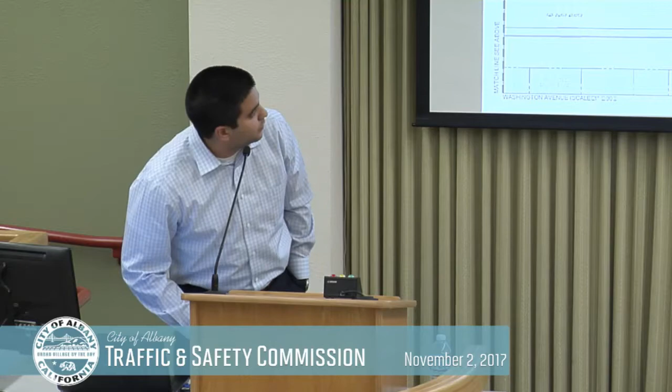All right, so we'll start with the San Pablo Avenue corridor. This is an overview of the entire corridor, and what we're proposing to do is shown in blue right now. Each slide will be zoomed in for a better representation of each intersection.

So this is right by the car wash, right where the city limits are. The intent is to put a...

Do I need to speak to the mic? Yeah, they have to. There's also a cordless one, so there should be one nearby. You turn that on the bottom. And it's helpful for the recording if you use your mouse to point at the screen. Oh, okay, then they can tell. Yeah, then it gets stored in the video like that. Great, okay. I guess I'll try using the mouse and pointing then. I can use the mouse, it's fine.

So right here at the city limits, we're planning to put some kind of gateway to Albany, as far as putting a median there, and then potentially a sign that says 'Welcome to Albany.' On either side, west and east, we'd put a bulb-out with a trench drain that runs through, allowing water to pass, but also adding landscaping to make it an inviting entrance into Albany and set the tone for the city.

This is just the existing condition, and there will be medians and planters in this area.

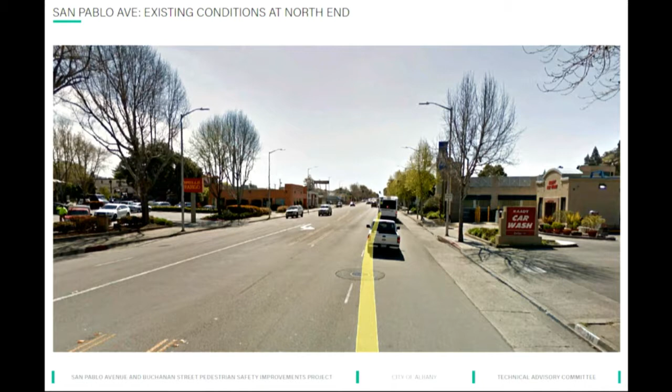The first intersection we'll look at is Brighton and San Pablo Avenue. One of the biggest concerns here is the left turning movement conflicts with pedestrians in this area. There's a lot of pedestrian traffic due to Albany High School and Albany Middle School. The goal for the entire project is to get pedestrians from one side of San Pablo to the other safely, without any conflicts with cars or bicyclists either. This is also an existing condition over at Clay Street as well.

So this is what we're going to propose to do at Brighton Avenue and Clay. For Brighton, we're intending to do some signal timing changes and add a lead pedestrian phase there. It would add about 5 to 7 seconds to the pedestrian phase to allow them to get into the crosswalk earlier before the vehicles can start, making them more visible to vehicles as they're turning left.

At Clay Street, we'll be adding a couple bulb outs on either side, on the north side. This will help shorten the distance for the crosswalks going across the street, and will also make pedestrians more visible to vehicles, as the bulb out will push them out into the crosswalk area so drivers can see them better. There's also a pedestrian refuge for anyone who can't make it across safely, allowing them to stand and wait without any conflict with cars.

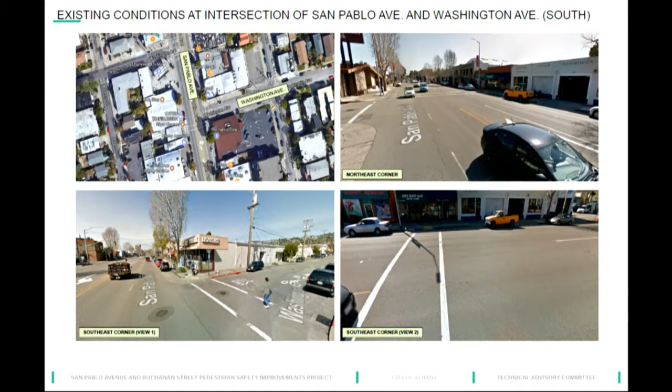Washington's a very interesting case in that it's a gap between two planned or existing bicycle facilities. Because there's a stagger in the intersection alignment, that presents a very challenging movement. Right now, if a bicyclist tried to get from the west side to the east side of Washington Avenue, they have the choice of either riding the sidewalk on San Pablo or trying to get into the center left turn lane across two moving lanes of traffic without the benefit of signal control at at least one of the intersections.

So what I have in front of you are 3 options we've developed. The first two, we were just trying to be very creative and throw all kinds of ideas out there. The third one, we actually received feedback from the Technical Advisory Committee on some other options they'd like to see, and we think that one is the most promising. So without further ado.

However, we've noticed that the auto shop will sometimes park in their driveways, so in a practical sense they may claim they have more parking out there. On the other side, on the east side of the street, we have several high traffic uses — a liquor store that gets a lot of turnover for curbside parking, and several restaurants, both here and near the north side. So we wanted to be really sensitive about the parking uses.

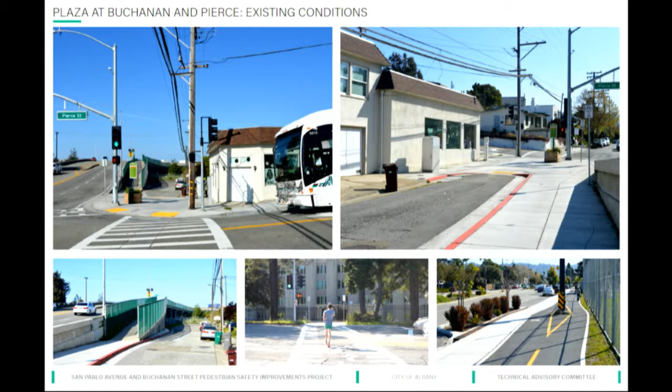And this is the Pierce Street improvements. So we're planning to extend out here and put a landscaped area in this area and over here to make it a little bit more inviting and add vegetation and some stones. And then, because bicyclists cross this street, we'll be increasing the size of the curb ramp to allow for easier access for bicyclists to get up onto the sidewalk and cross Pierce Street.

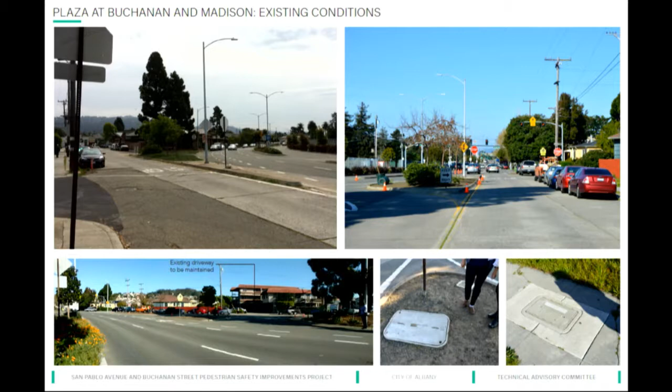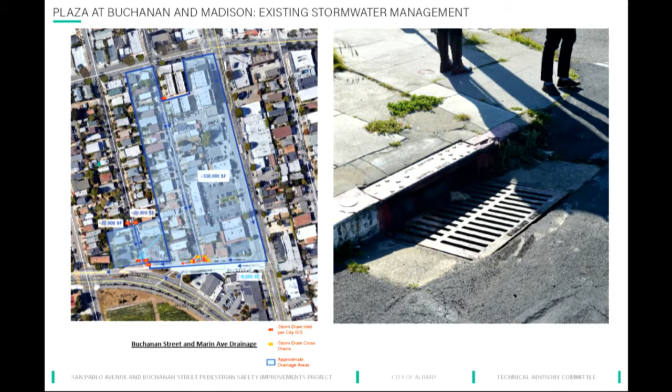This is a representation to show that there's a lot of water coming down Madison and Adams Street and going towards Buchanan Street. We looked at this as an opportunity to implement a rain garden in the parklet to treat the water, but also provide aesthetic appeal to people.

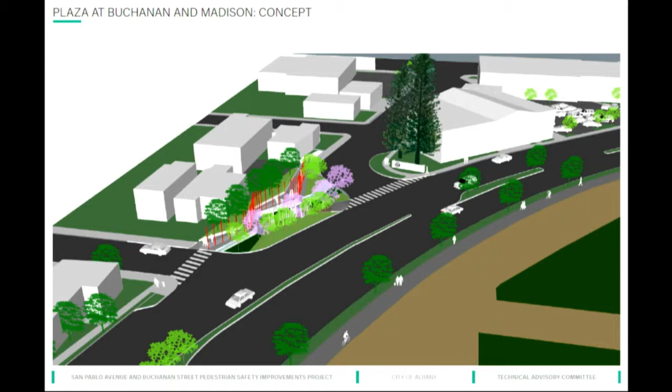Here's a couple more representations of the park. I have to add that this is still just a concept. I think the Park and Recreation Commission will have to have more of a say on what is inside this park, whether it's a bulb-out or a giant pocket park. But this is just a concept right now.

So just a number of different angles to see. You can see here the rain garden represented in the dark green, and the gutter on the right.

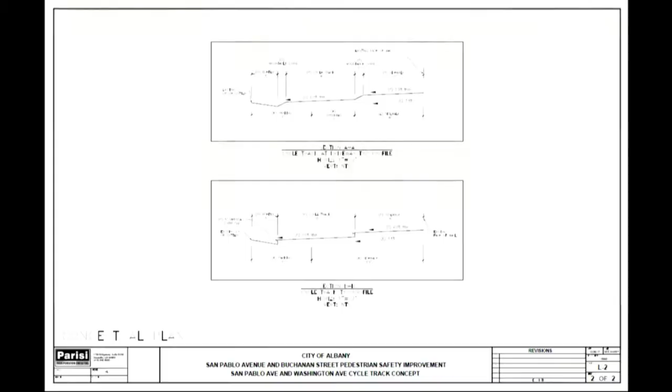Everybody has a copy of the public comment we received via email from Preston Jordan, representing the Strollers and Rollers. I think after we hear public comment, I'd like to go through Preston's letter item by item, if you'll give me the leeway to do that. But it's pretty detailed, so I won't consider it as questions for now.

I know that we have a number of bus stops that are old, near side, and in uncontrolled intersections. When the city was going through the complete streets plan, did they consider bus stop relocations as safety improvements? We have not, but this is an opportunity to address that if we can.

I think the ones that come to mind are, well, I think there's only one set that we would really have to look at, and that's aside from Solano, San Pablo and Solano. Well, there's also some older stops on Buchanan as well. San Pablo and Solano is not included in the project limits. The project limits for this process are the southern leg of Washington.

So then at Portland and at Castro, there are near side bus stops, and I think those are both uncontrolled intersections. Is that correct? Yeah, it'd be good to see if we can take a look at those. I can make more comments later in the comment period after public comment.

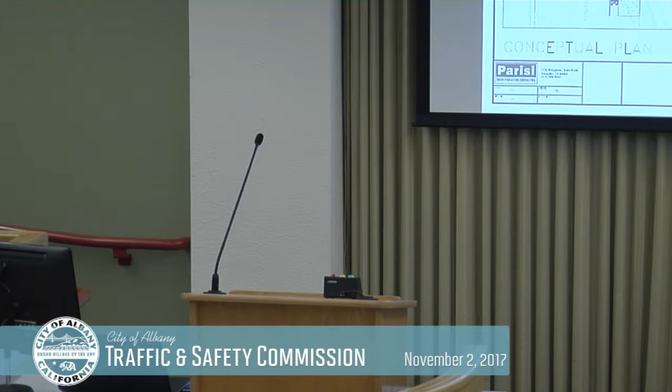Bring it back for comments. Well, it seems like we're going to need some time to talk about the Washington options and some time for me to go through Preston's letter. So, if people have other specific suggestions, I might ask that we do Preston's letter first, because it may cover some of the same ground. And then if people want to add additional specifics, do that after. Does that make sense? That would be okay with me on an intersection by intersection basis. Yeah, but if people have other more general comments, maybe that should go first.

It's great to see the plan coming to fruition. Yeah. I guess I can try to make this general.

So what I was asking questions about the bus stops, there's a few things we want to avoid generally. The worst possible condition for a bus stop location is near side uncontrolled, right? That's by far the most dangerous. There's unfortunately plenty of incidents that have happened because of that, where you get off the bus, or you're not on the bus, and then you try to cross the street, and that bus is prohibiting your view to get across.

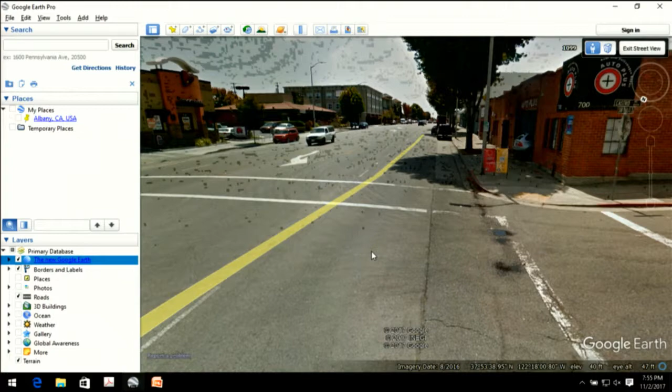I do want to question that more, but I'll do that when we go intersection by intersection, if you don't mind. Can we wait till we're going through all of them? Did you have any other? No, I think it's good to go through each intersection and talk about it. And then I think the discussion about the Washington bike treatment should be separate. Maybe. So do we want to cover everything but that first? Yes, okay, that's a good plan.

So starting at San Pablo and Brighton, the Strollers and Rollers request is to move the crosswalk to the north leg, because most of the conflicts with moving vehicles have been people from Brighton turning left onto southbound San Pablo, where they've already picked up some speed as they go through the intersection. If the crosswalk was on the north side, any conflicts with moving vehicles would be people coming from Brighton and turning right onto San Pablo, who would not be moving so fast yet.

Was that considered at all? Yeah, it was considered. You can see on the north side, over on the west side of the street, there's a traffic signal there that would have to be relocated. There's not enough space to put a curb ramp there in the current sidewalk, so you would have to bulb out to put the crosswalk or the curb ramp in. But there's an existing driveway right next to that building that we would have to reconfigure. And also, with the drainage issue along San Pablo Avenue, there's not a ton of storm drain in the area, so it would create low points at the bulb out, and we'd have to install storm drain infrastructure.

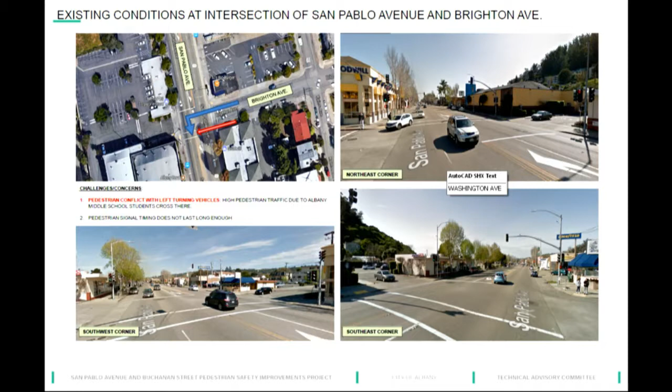So where we have it shown on our plan is where we feel it works best with the drainage, because at Clay Street there is some storm drain infrastructure, and that's where the culvert runs through as well. But past Clay Street going towards Brighton, there isn't any storm drain infrastructure. We would have to run a storm drain line from Brighton all the way down to where the center of the block is and where the creek is. So we did look at putting bulb outs in this area, but due to the drainage issue, it was not necessarily feasible in this phase of the project.

Okay, so what I'm hearing you say is that these requests are technically possible, but significantly more expensive. Is that okay? Towards helping us gauge how important that might be, having a pedestrian leadoff seems valuable. Unfortunately, if there are people with pent-up desire in their cars to turn left onto San Pablo, that would actually give the pedestrians going west just enough time to get in their way. So it's not a huge solution.

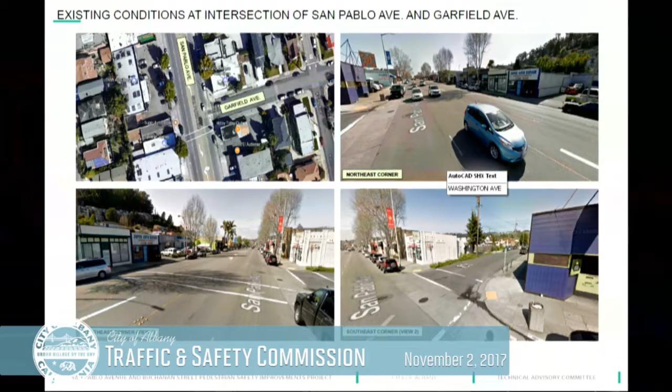I think I skipped over San Pablo and Clay. If anyone has, there were no strollers and rollers comments on that one either.

Back on the issue at Brighton, could you put a trench drain in on the backside of the bulb, and would that be a more affordable solution? So we've looked at putting trench drains in, but because of the bulb out, the curb ramp would be in part of the bulb out. Trying to run a trench drain underneath it, there wouldn't be enough depth, so you would have to run it behind the curb ramp and go around it to get it to the other side.

Would you have to go into the sidewalk to do that, or can you just? So it sounds like there's not enough space to do everything—the ramp, the signal, and then a trench drain on the backside. Yeah, you'd have to route it around behind the curb ramp, so you couldn't follow the flow line, you'd have to divert it around the ramp to get it to the other side, just because there wouldn't be enough depth since the curb ramp would be taking up most of the bulb out. Right, okay, that makes sense.

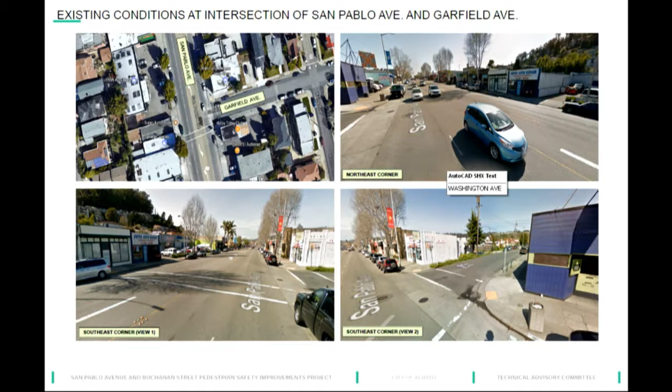Okay. All right, where were we? I think I'm ready to move on to Portland unless anyone has further issues? Oh, so Castro, Castro, yeah.

Okay, so strollers and rollers requested the east side. Consultants commented that the driveway is right where the crosswalk would have to land. Is there a possibility of shifting that part of the crosswalk a little bit to the north? So have the west half of the crosswalk at the intersection on the north side, and the east half a few feet to the north, with a kind of a Z shape in the median?

The driveway takes up, I think—see from the image, I'm not sure about your cardinals—so this would be a north side crosswalk. The goal is to move the crosswalk to the north side, you're saying. And the problem is where it lands on the east, there's a driveway. I'm wondering if the whole east half of the crosswalk could be shifted far enough north to land north of that driveway, using the median as the cross piece of the Z.

That's creative. That's something we could consider and look into. It makes it a little bit longer walk for people, but I think having a crosswalk with the median is a big advantage, and in this case, that means the north side.

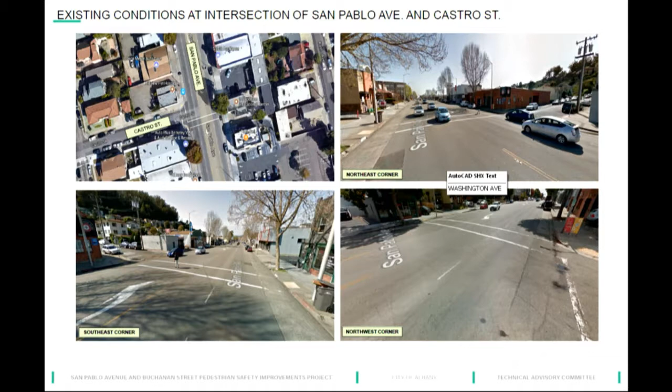What about bulb outs here? Or is it the same problem with millions of dollars worth of drainage? Yeah, correct. Okay.

So we're asking both things for this: move the bus stop and explore whatever we call this crosswalk on the north side. Okay.

Brian, when you speak like that, your voice doesn't get into the recording. You could come up to the mic, or we echo you. I'm not that good at echoing, though.

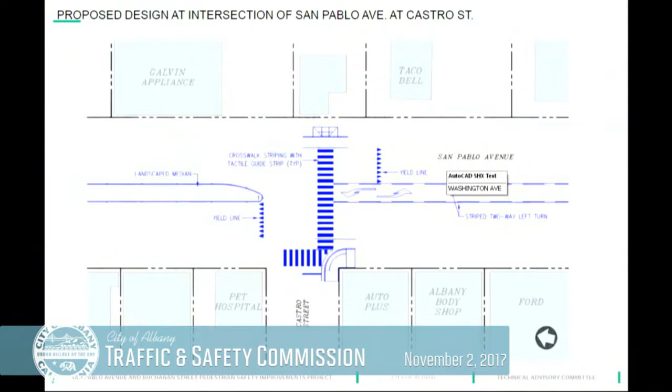So a couple of questions. One is, can you also go, if it was on the north side where the pet hospital is, cross straight and then do a diagonal to the business to the south? Like that?

I don't know what a scramble is. That doesn't have a signal head, there's no signal there, so you lose the benefit of a refuge if you go this way. If you come up here and here, then you can have a refuge and do a split leg crossing. That's pretty irregular though, isn't it? Does anybody do that?

I'm getting lots of shaking heads there. Anyway, that's another possibility, the Z could be very good. I would encourage that. I think the benefit of the Z is that the extra distance a person has to walk is done in the median, so you're safe and protected, whereas with the diagonal it's an interesting idea, but the extra distance you're walking on the hypotenuse is out in traffic.

And so then my other question was for the bulb-outs: is there a way to do like a plate here, and then just have it be open under the plate, and could enough water go under that? Like trench drains. Yeah, so it's kind of the same issue.

So we would only be bulbing out about 5 feet into the gutter, because the gutter pan right now is about 7 feet wide. Per Caltrans standard, you need a 2-foot offset from the travel lane for your bulb-out, and what that would do is put your curb ramp fully into that bulb-out. So if you were to put a trench drain across, it would run right through your curb ramp, and that's why you would have to direct it around the curb ramp to get to the other side of the curb ramp and to the other side of the gutter.

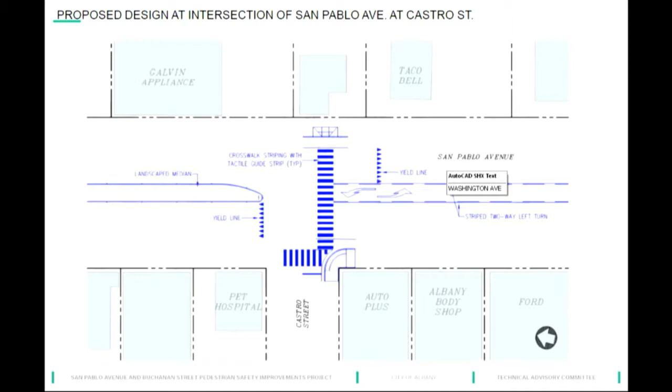Assuming that storm drains aren't a huge issue. Sorry, consistent theme. Well, I guess you could do it even without a bulb out.

Okay, should we move on to Portland? The only request from Strollers and Rollers was once again to add bulb outs if possible. I'm going to guess that you'll tell me that's a drainage problem, but...

Correct. As you get further away from Clay and Brighton, there's not as much water as at Portland or Castro, but it's just the construction of the entire storm drain line from Portland all the way down to Clay that's really expensive, and that's partly why we're not proposing any bulb outs in this area.

Okay, and then we did have a public comment. Since San Pablo is a Caltrans-managed site, what do they ever do for storm drains and things? If it gets bad and flooded, do they have any responsibility, or is it just Albany?

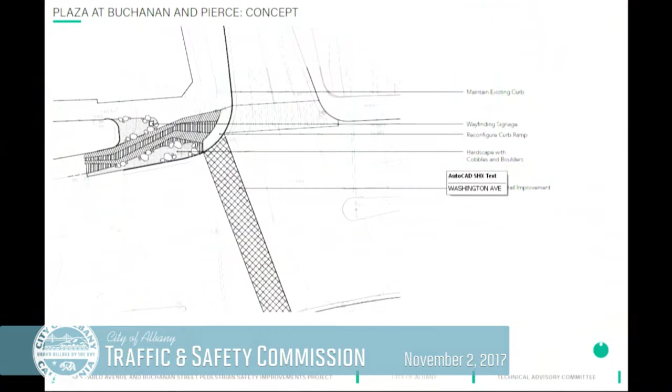It's just drawn differently, maybe. I think it's the same. Is it the same? I think the concern is just to make sure there's plenty of room for a bicycle, including a bike with a trailer, to make the turn from the bike bridge on the west side of this complex around to the crossing of Buchanan Street. The way it's drawn here, it looks reasonably good to me.

Let's see, what does the letter say? For people heading west from the intersection with Pierce, and east to that intersection, it may be too narrow for the user volume, which will likely increase once the complete route from the hills to the bay is built, which will be soon. This kind of narrow around the curve.

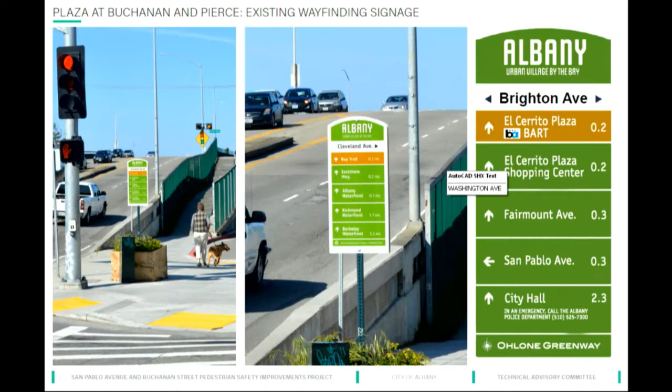Sure, well this was brought up, I think, at Park and Rec, but many cyclists actually transition onto the stub end of Buchanan there, proceeding westward. Oh, onto Cleveland, to go down to Cleveland or something? To go down to Cleveland. Yeah, so they actually call it... it follows through there, right?

Actually, this, I don't know what's this called? I don't know what that's called. The Cleveland Spur, we call it. Oh, okay, so the Cleveland Spur, sorry. It's a new sports team.

So in fact, some people instead of... well, some people come up this way to engage with the light and cross this way, some people come around this way, but this has been rather fluid, and as a user it's been nice. If you stick landscaping there, I think that actually gets in the way.

And I'm also worried about the landing area, taking up a lot of the width.

I think Preston in the Strollers and Rollers letter actually suggested things like vertical mosaics on surfaces, and Strollers and Rollers might be interested in partnering on that.

I was wondering if some sort of pergola structure as a placemaking element, something that would be supported at the edges and perhaps over the top, could be functional for sun or could be a gateway into it, a gateway symbol. It could be a shade structure, or it could just be a suggestion of a shade structure.

But something that was not on the ground and taking up that space. By leaving the space, we're leaving a lot of future flexibility. You're leaving room for cyclists and pedestrians to gather there, and you're leaving room potentially for that business to change over the years and use that as a patio space.

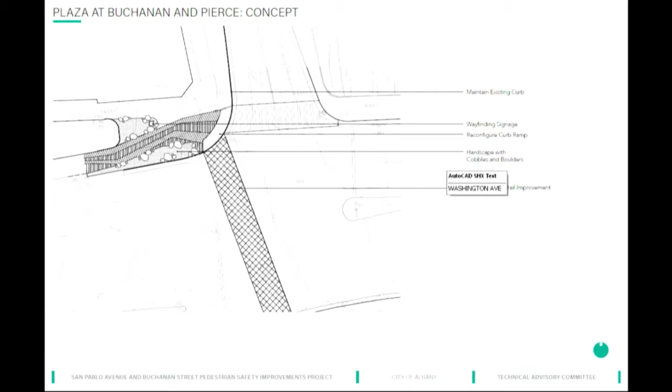Okay, I have another question. So in the plans we got, it actually shows the extension of the bike lane marking westbound. It's not in the presentation, right, so it's not in the presentation.

So my question was, it's actually curved to hit the curb ramp at a right angle. But as a fast cyclist, that's not the path I would take, because then you'd have to immediately reverse the curve and angle up to get up the ramp. So, and in fact, if I was a fast cyclist, I'm sorry, I can't point to this, but it's curved straight, and then it angles to the right and gets closer to the crosswalk, and then it hits the curb ramp at that point.

If I was a cyclist coming there, I would probably want to take the straightest route between the lane I had been using up to the signal and then onto the plaza. That would allow me to do the least turning to get to the ramp, assuming there weren't other users on the ramp, in which case I'd have to slow down, and then it's a different picture. But the reason I bring this up is, if it gets marked as projected here, cars coming off the hill, off Pierce Street, would presumably feel comfortable if they didn't see pedestrians to advance over the crosswalk, looking left, and then advance up to that bike lane even if they saw cyclists, and I would want to cut through them. So I see conflict there.

You're saying straight line, but I'm also wondering, are you leaving room here for a right turn on the other side, or is that parking? No, the right turn should encroach into it. So it's a shared area, right? Yeah, so yes, the answer is straight line. Thank you.

Okay, are we done with Pierce? So the next strollers and rollers comment is at Taylor. There was concern about the north side bulb-out gutter pan being kept out of the westbound cycling lane. Preston wasn't sure from looking at the plans if that had already been taken care of, but we wanted to bring it up as a concern. Yeah, it's been taken care of. Okay, so the gutter pan is outside the cycling lane? Correct. Okay, great.

And then on the south side with the bulb-out, the southeastern curb ramp there is part of a bike facility and should be sized at the full width of the bike path rather than narrowed down the way it is here. Yeah, correct. Okay.

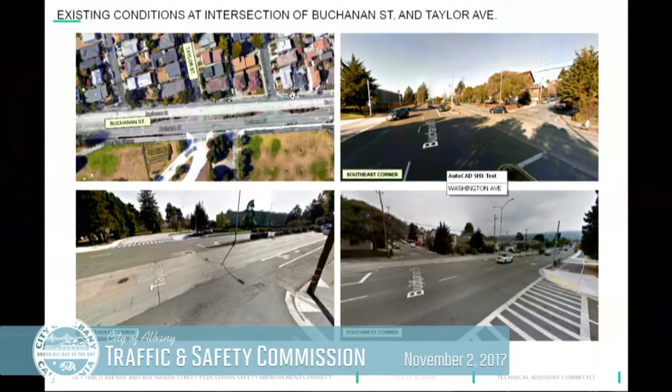If that's possible in the scope of this project, yes, it'd be at Polk. Would that be part of this project? Bus stop relocations are essentially free, right? There's no infrastructure installation cost, but the city has to do their notifications, people complain, and you have to go through that whole process, so there's cost that way. But in terms of direct infrastructure, there's no cost.

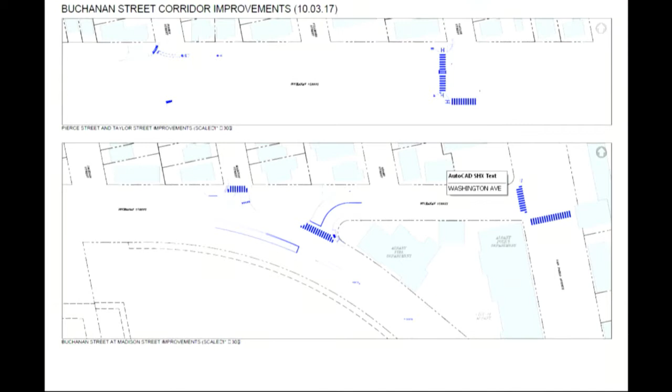What stops there, is that a Transbay? Is it like the last one, G or something? No, I think it's a local bus that comes across. I've got something more on the Buchanan Taylor, but yeah, I think just Polk going far side on the bus stop, going westbound.

I like that the HAWK signal on the south side is fully clear of the crosswalk. That's great. It looks like it's actually in the bike lane, but I'm sure you're going to work that out.

In the plans we got, there was no east-west curb cut on the northwest corner, but it looks like you have that there now. You don't have to move the telephone pole, do you? No, we'll make sure the HAWK signal is out of the way of that. Okay, cool.

Great. You brought up the gutter pan? I did. Great.

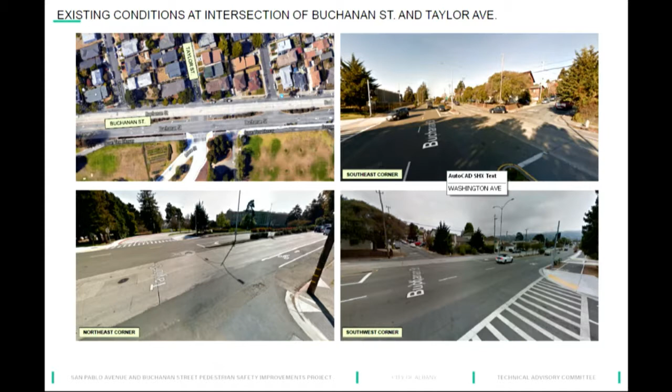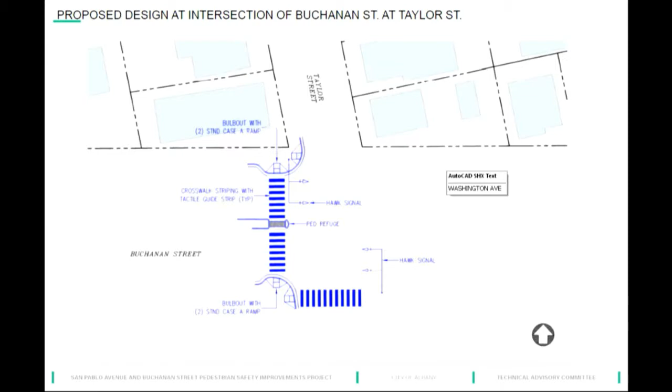Are we ready to tackle Washington? If I could make one correction to something I said, I went back to look at the Complete Streets report from a few years ago, regarding the San Pablo segment between Marin and Buchanan. The proposal was not to take out parking, it was just to narrow the travel lanes. So I wanted to correct myself on that. Actually, we haven't done the Buchanan extension.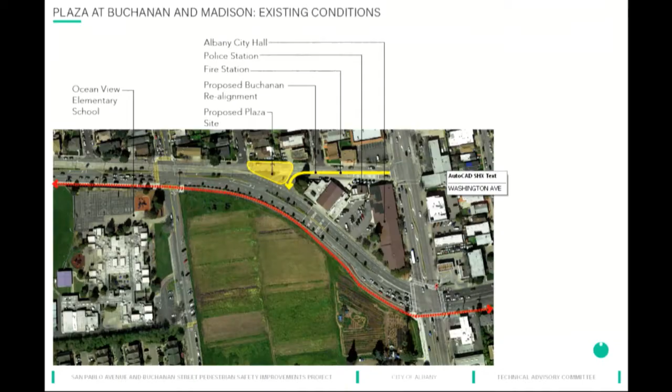Pocket Park, have we? We haven't talked about it because Strollers and Rollers didn't comment on it. But if you want to comment on it, you should. I would like to comment on it. Yes, is there a particular slide you'd like to look at?

I'm sorry, is there a particular slide? I don't remember your slides. Probably the first one, which is different than what we have. But this is great, it's really hard to get from the corner off of the triangle here now, so it's fabulous.

I was curious about, at the extreme bottom of the screen, there's the little tip of curb that comes off the median, and I was wondering what shape that was going to be, and why the median ended in that long nose. We extended the median out past that part so that someone at the stop sign there couldn't cut across the street. That's the reason why we extended it out that far. So it enables it to come out farther and not block people turning left. Correct. Great, thank you.

How much parking is eliminated by putting in this park? Don't know an exact number. I think it's like 5 to 6 stalls.

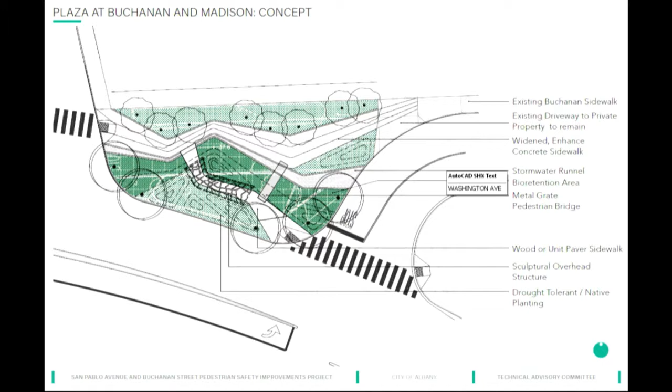That's all I had on that. I just wanted to say that looks extremely cool, and I can't wait to see a more fleshed out version of it.

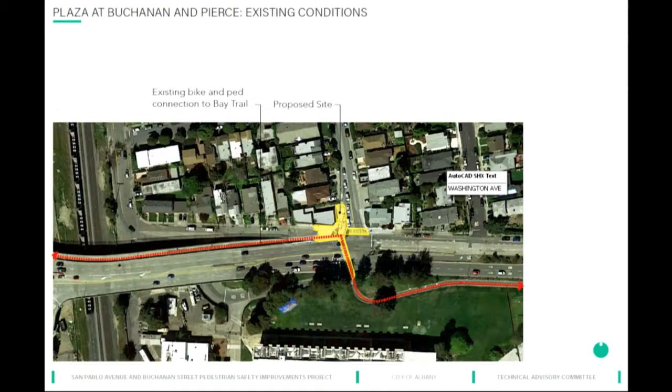Can I ask about the dollars available? Are we done with this specific location? We're gonna move to Washington. Oh, forgot about Washington, yes, let's go. We'll put a placeholder in general stuff, right? Save the hardest one for last. Because I have one too.

So there is some strollers and rollers commentary here, but I think we should probably resolve the bike flow first, and then consider which of the strollers and rollers comments are still germane.

I remember the consultant said they were most pleased with option 3, and to my eyes it looks like option 3 has almost exactly the same design as we now see mostly constructed, with the exception of the non-functioning HAWK signal in front of Sprouts and the senior housing. So it's a design that's sort of familiar to us now, and might be familiar to users and therefore more comprehensible. On the other hand, it's more complex because of the driveways.

Can you explain the design again on the east side of the street? So the bike's gonna come - in option 1, yeah option 1 - westbound on Washington, and then on the corner it's a buffered bike lane at roadway grade. There's a ramp up onto the sidewalk. You travel along the wide sidewalk and then proceed to a curb ramp with the bulb out, continuing to Washington West, but with no designation of a bike lane on the sidewalk.

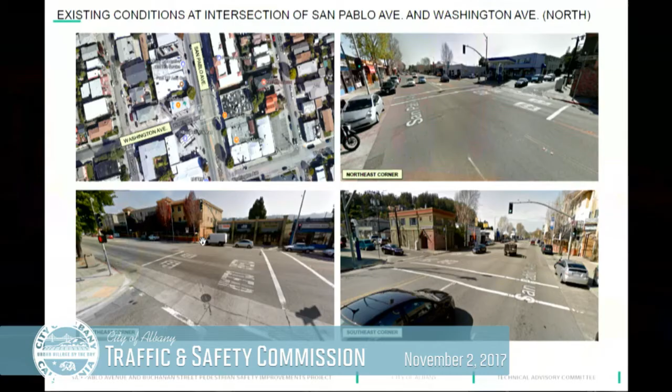So there's a driveway - there are 3 businesses in one building at the intersection on the east side, and there's a driveway at the north of that building. Could the crosswalk be placed where the white truck is? In the bottom left image, the white truck cab is parked blocking the view of that particular driveway. So could a crosswalk be placed to the north of where that white truck is?

Immediately to the north of it? Would we remove the tree, or is it farther north of there? Well, the crosswalk has to be controlled by the traffic light, so it can't be moved too far. It looks like there might be room on street view - I'm on satellite view on Google Maps - to miss that driveway and the stoplight post. Yeah, looks like right here.

And just because I don't remember why they're requesting that movement - because that's where the median is, to get a refuge. Just for the median, okay.

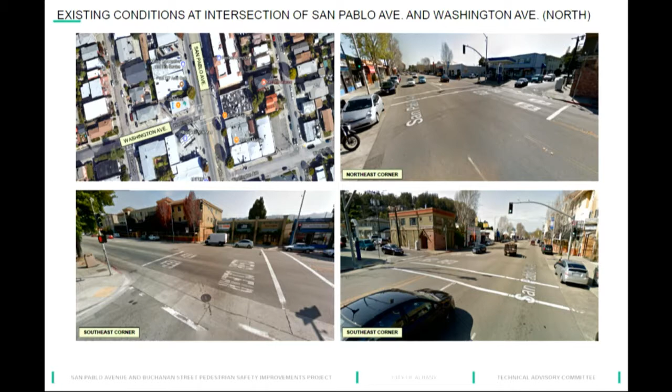And it also, regardless of which option, at least in option 3, reduces conflicts with turning bicycles in that complex corner, the southwest corner, where right now the bulb out that's shown looks like it creates a challenge for option 3. So if the crossing was on the north side, then the crossing is completely independent of the system of bike paths - that seems better.

There's one trade-off I'll highlight, which is the left-turning cars from Washington will be conflicting with that relocated crosswalk. So it's a trade-off - I acknowledge that, but it would calm down this high-traffic corner where the bikeway would intersect, so I think the advantage of the median is strong enough. The left-turning vehicles would be conflicting with pedestrians making this movement - it's the same high-speed conflict that I complained about asking for Brighton, the opposite thing. We'll add safety.

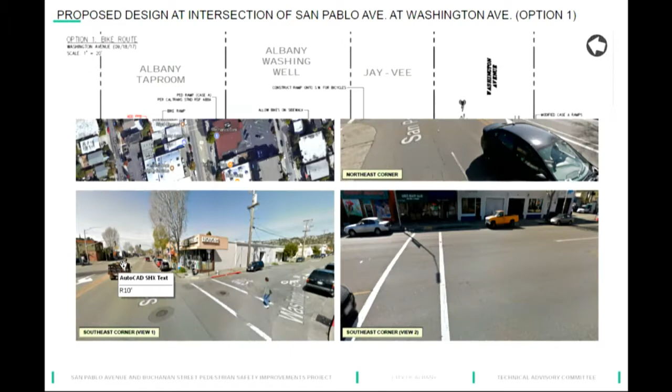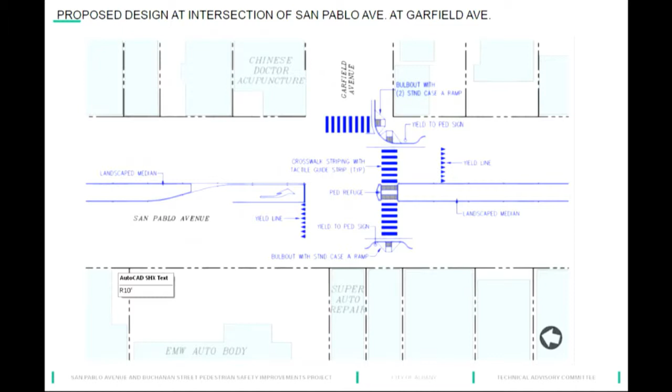I don't remember if I sent you this comment, but somebody sent me an email before this meeting that the traffic signal at Clay is hard to see from far away, and I think that's intentional by Caltrans. They're wondering if it can be changed to a regular ball instead of a directional one - it's like a refraction, so that you can't see it until you're past the previous stoplight, almost at that one. I think it's because of the proximity to each other that they have that mechanism.

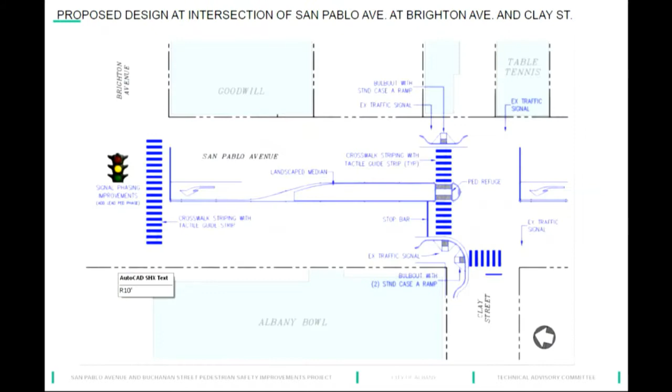It's clear. Yeah, it's Clay. And it's specifically southbound Clay.

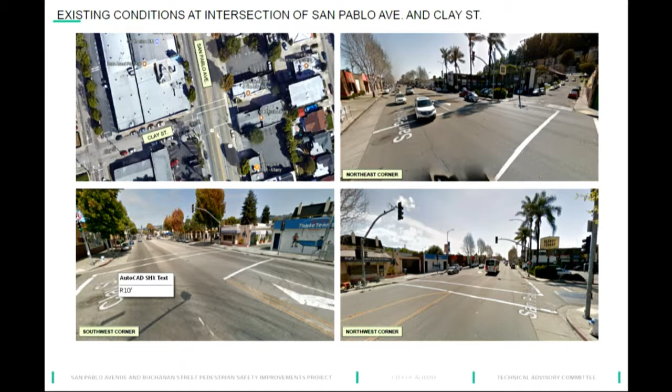Okay, there was one more Strollers and Rollers comment at Washington. And that, I promise this will be the last from Preston. Ooh, I got a text.

I would also argue that area gets used for deliveries in the median. Vehicles are stopping in the median. I think the one used for deliveries is south of the intersection at Solano, between Solano and Buchanan. I've seen them there. It's also an area where emergency vehicles sometimes cross over to go onto the opposite direction of traffic to get around congestion at Solano.

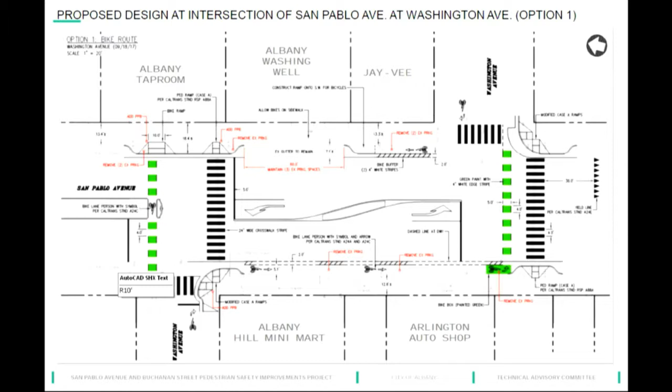Okay, it's out of the scope. Well, moving the north crosswalk would help us. I think if we do option 3, there would be a hawk signal here, and the refuge would be less important. The signal would be coordinated with the other local signals, which would hopefully also help calm crossing. Yeah, if there's a hawk.

All right, I think this is like the Wild West. Hairy. No pun intended. I resemble that remark.

All right, okay, what else? So we're back to general comments. Back to general comments, overall.

So we brought up lighting before, and I would love to see lighting addressed at the crossings wherever possible. It's particularly dark at Garfield.

Also, we're making a lot of assumptions about where people cross, and I think many of them are good assumptions. But I would love to see wayfinding to help people find the best crossings, both by bike and on foot. I think that could really help make this work.

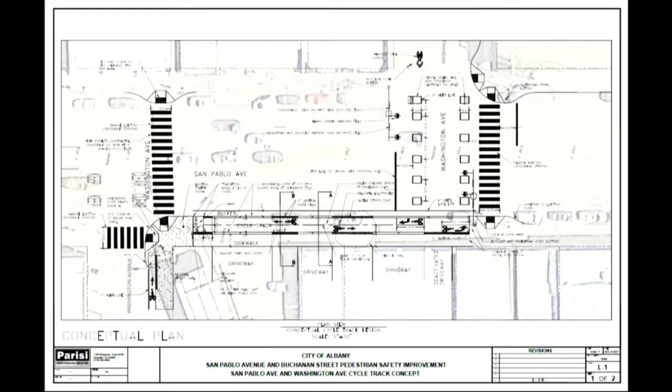We'll move on to announcements and communications. Item 6-1: Traffic and Safety Commission member representation on the interview panel for the consultant selection for the Solano Avenue Complete Streets project.

It's fine, it's early - public meetings, public record. Thanks, thank you, good night. I'm sure it's not the first time they've gotten that.

So we do have the Solano Avenue Complete Streets Conceptual Design and Public Outreach project. The RFP went out last week or a couple weeks ago, and proposals are due December 1st. We're anticipating interviews the second week of December, if I remember correctly.

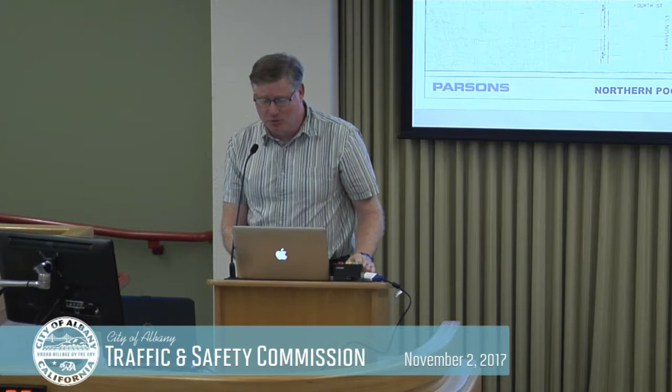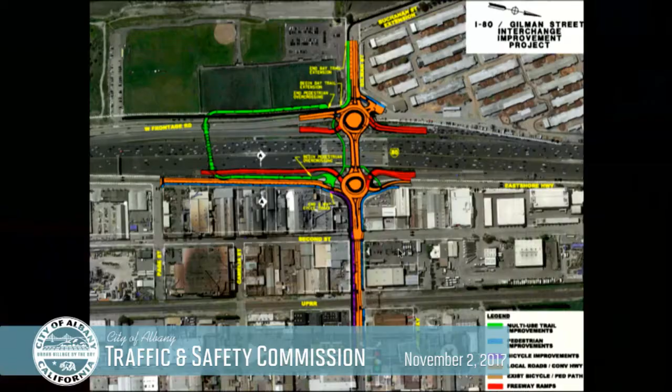This is mostly me as a representative of Albany Strollers and Rollers. About a year and a half ago, Albany Strollers and Rollers wrote a letter to the I-80 Gilman project team, and only recently was that really responded to. We had some questions about their active transportation solutions, which you can see here.

Basically, their initial proposal was to have all cyclists who wanted to be off the roadway come down Gilman, at some point get on a cycle track, cross over Gilman, then cross the frontage road and go over the freeway in what is not a short overpass.

Strollers and Rollers' goal was really to make this a more accessible option. We're worried about people trying to get down Gilman or back up it, worried about crossing Gilman, and want to make this as accessible to all ranges of cyclists and walkers as possible.

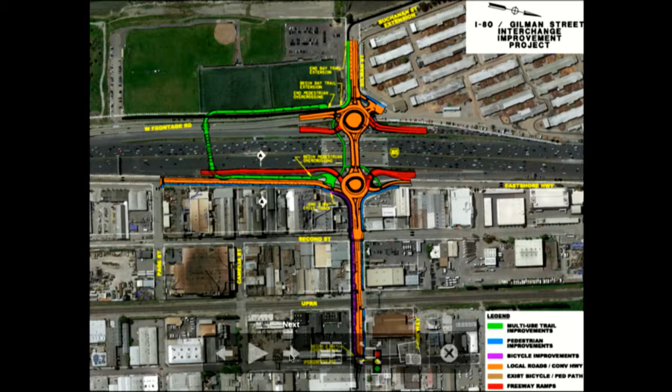So there's been an ongoing discussion and some meetings. Some options were looked at, including - I should mention our ATP actually has a desire to have a crossing of the freeway at the Cerrito Creek corridor. So one of our suggestions was, could there be a way to have a northern crossing that might connect to the Cerrito Creek area?

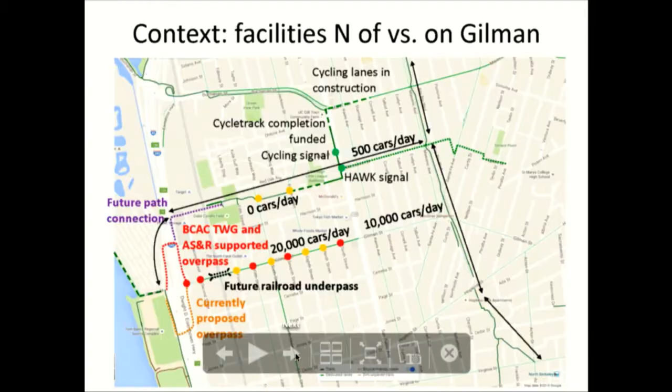It might look something like this. Turns out there are a lot of issues with making that work, including construction in a wetland and getting that much land from the Golden Gate Fields property owner.

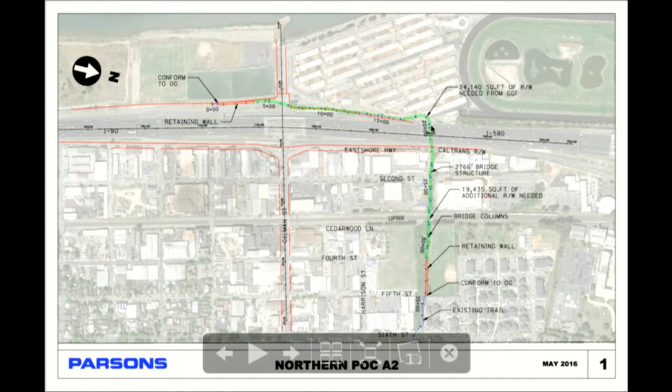It's looking now like there might be a compromise to have a northern U that would also take some land from Golden Gate Fields, hopefully touching down without a further crossing of the frontage road or Gilman over at the fields. There are a lot of details I won't go into, but the idea is to create a desirable enough crossing that avoids enough road crossings that it will be attractive to go that far out of the way to get over the freeway.

So that proposal wouldn't connect to the Codornices Creek potential crossing, right? That is correct, but there would be the potential to connect from that corridor in some fashion in the future.

So with that, the western touchdown looks here like it's to the north of Gilman Street. That's correct, but in this particular view I have some of the current information, not all of it. The goal is to have one terminus of this be at the south of Gilman Street, west of the freeway, right at the ball fields, adjacent to the Bay Trail, without any further crossings. And then the other terminus would be on the north side of Gilman, east of the freeway.

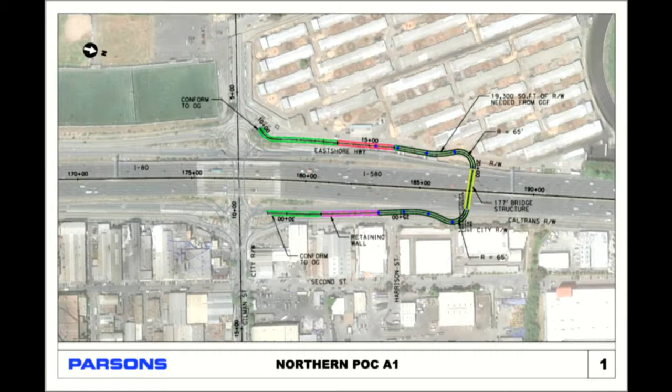Yes, Leda and I have been attending a series of meetings, and they will be continuing over the next few weeks. We tentatively anticipate that the Alameda County Transportation Commission staff will be attending the December 4th city council meeting to make a presentation on this.

And that timing with the city council is important because there is a possibility of some discussion of this project. I'm not clear exactly what it would be yet, but some discussion at the December 7th commission meeting, the Alameda County Transportation Commission meeting. It's a funding-related discussion.

We want to have community input on the items Ken mentioned, as well as the vehicle and bicycle access issues that might be impacted by the traffic circles at Gilman.

It's one of these projects that moves really slowly, and then all of a sudden a lot of things happen quickly. I think over the next couple of weeks we're engaging more with the commission on this in the last three weeks than we have in ten years. So we're pleased with that, and we hope to report back to you as a commission at some point in all this.

For the record, the December 7th meeting is important because they need to have an agreement on $4 million of funding, and one of the requirements is to have community support of the project.